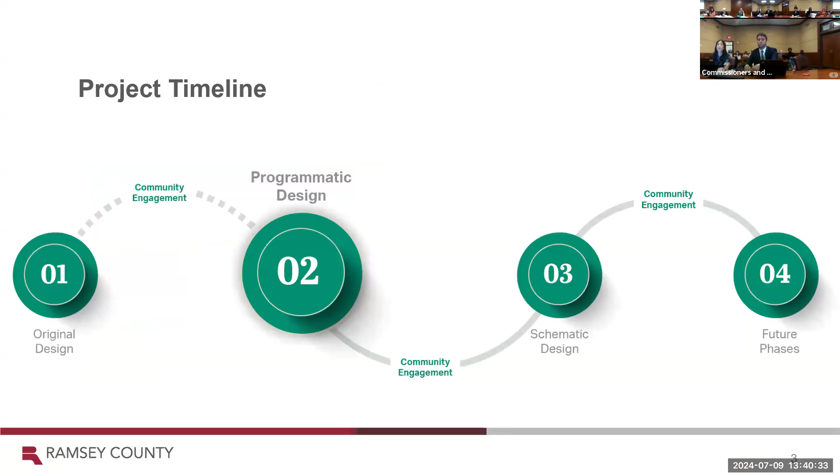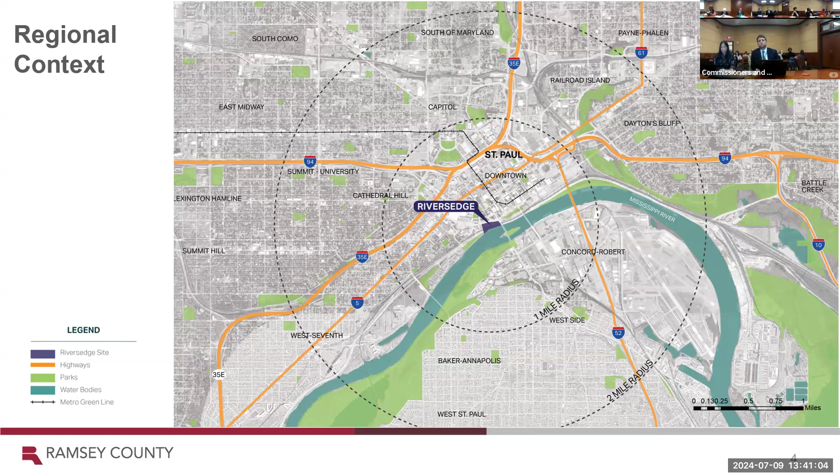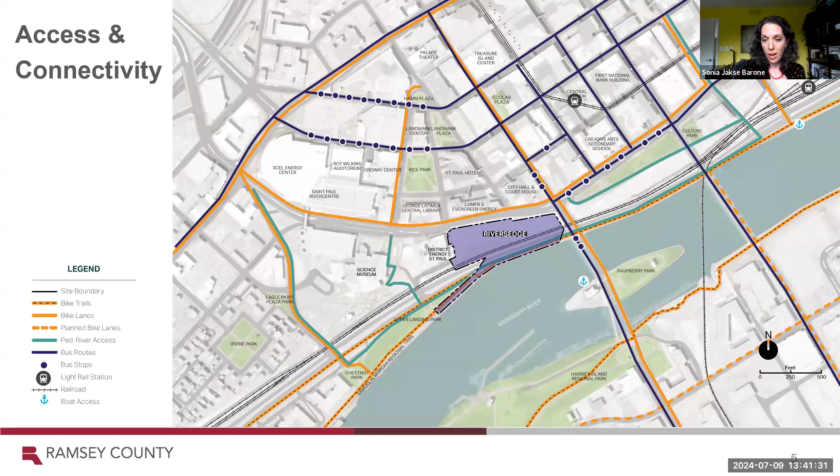Our site is located at a nexus of two really important adjacent projects, one of which is indicated by the orange line you see there, the extension of the Capitol Bikeway project in downtown St. Paul, which will be right across the street from our project. So very excited to have that coming through right as we're also looking at bicycle connectivity. And then also the River Balcony project, which is a larger project of which our site is a component. Claudia, do you want to speak a little bit more to the details of the River Balcony?

Yeah, absolutely. So River's Edge sits within the river balcony. We are one key component of the riverfront, key for a number of reasons, including we have funding, so our project is a little bit ahead of other projects. We also are at a key location. We have the last developable site of this kind on the riverfront in downtown St. Paul, so the opportunity is really significant for us here with River's Edge. But again, within the context of the greater river and downtown St. Paul in general, we are very closely tracking and partnering with our adjacent projects.

As Sonia mentioned, the River Balcony is one of the key projects as well. We meet regularly with them and other downtown stakeholders. The Science Museum is also embedded in that River Balcony; they are also working on a major project, and we're working closely with them. The city of St. Paul and their Public Works Department, we are coordinating with them on a number of infrastructure projects, bridges, roads, the Capital City Bikeway as another example. So I just wanted to highlight that we are a major project here, but we are operating in concert with all of these other projects right along the riverfront, and together I think we will be able to really transform downtown St. Paul.

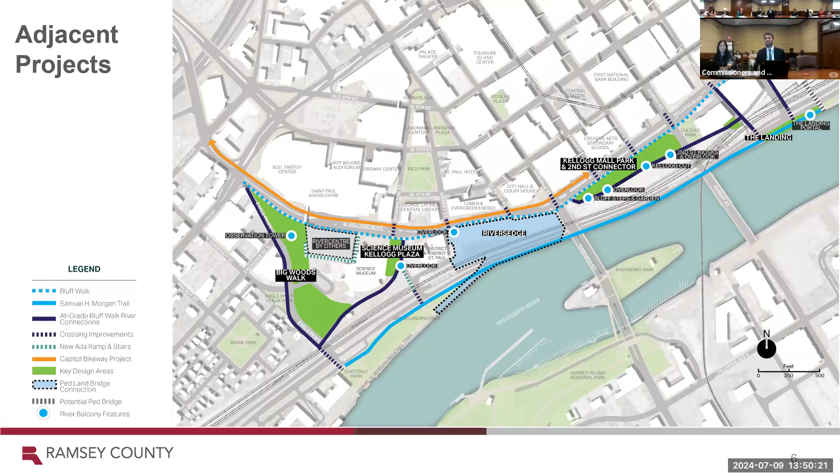At the same time, we were working on the Union Depot, so there were multiple pieces happening. A lot of city people had gone to see the High Line along the West Side in New York, and that was how they connected their river. People came back saying, well, we could do something similar. And the word balcony and High Line sort of got fused together. Interesting — the High Line's pretty cool. This study is part two; there have actually been two studies that reaffirm each other.

Sonia, I think you pointed out. Sorry, I apologize for stepping over somebody there. I'm just excited to show you what we've got coming up.

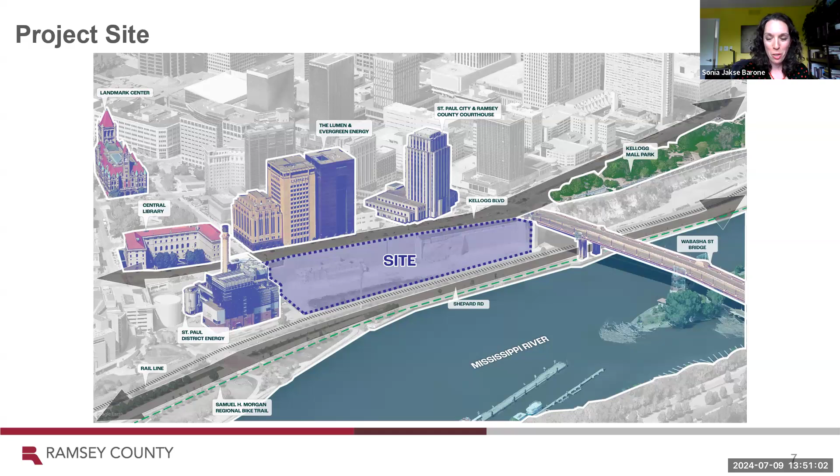So as I was saying, we're going to zoom in and focus on the River's Edge project specifically. You can see the Kellogg Mall Park as one of the connecting pieces noted in the river balcony, and the trails below and above here, as well as some landmarks that you're familiar with, of course. Next slide.

When we were out there earlier this year, we took a series of photographs just to see what we had out there. But as we were looking through them in preparation for advancing the design and this conversation with you, we picked a couple of these out because of the impact of the visuals.

You can see the opportunities here. When you're up on Kellogg Market and St. Peter's in images 1 through 3, there's potential for wonderful views out over the river. And when you're down below on the river in images 5, 6, and 7, you can really see how there is an opening that is ready to be developed right there at the edge of the downtown urban fabric.

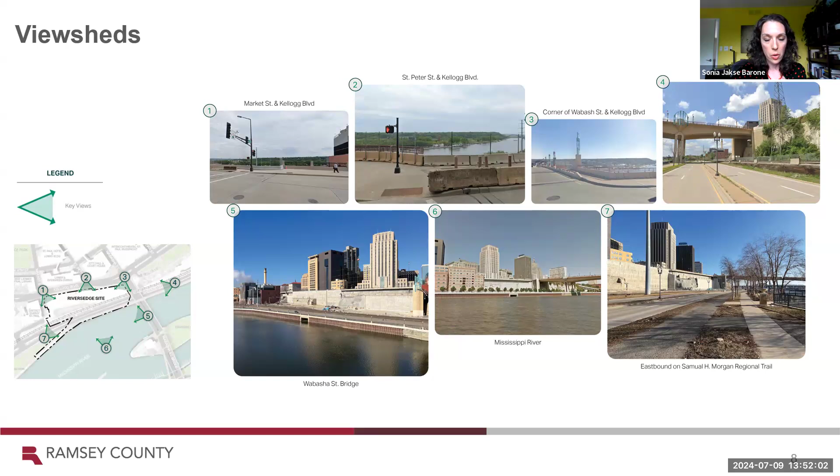So I'm going to turn it over to the NEO Partners ladies who are there with you in person, to introduce the engagement components that they've been working on.

Hello everyone, it's a pleasure to be here with you today. As you can see, I work on engagement at NEO Partners. I'm the Senior Community Engagement Specialist, and my colleague Kylie and I have had the wonderful opportunity to work on this amazing project. Being someone very familiar with St. Paul, having been raised in the city, it's very exciting to see some of this development that will be happening in the future.

Some of the things we've done are key stakeholder interviews. As you can see on the screen, we had 11 key stakeholders in the downtown area and surrounding areas that will be key to understanding the possibilities in this space.

We wanted to make sure people were informed of what is happening in downtown St. Paul. So with Ramsey County, we came up with a robust list of almost 80 key stakeholders, and we had strategic and concise conversations with 11 of those stakeholders. We will progress into more of those conversations as we continue engagement.

In those interviews, we talked for about 60 to 90 minutes with key stakeholders about what this parcel of land really means to them, ways their constituents could actually be in the space, and engagement they'd like to see in the future for this project. We were able to come up with distinct topics and issues important to people, and use that in developing the plan for engagement as we go further.

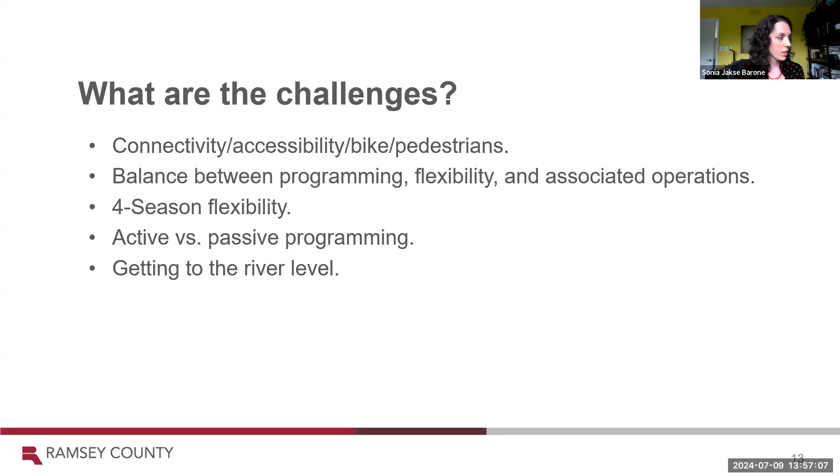We continued our conversations - it was a full workshop - but at the end there were 6 key words that stood out and rose to the top as goals we wanted to make sure we went back to as we went through the design and evaluated our progress against them.

First one being inclusive. That was about welcoming in - you heard from Claudia about the comments that have been there all along about making this a public space, right? Prioritizing public events, but also making sure that the public of all ages and ability levels can access the site and the connection to the river, which brings us to number 2.

Obviously the connection to the river is a huge, important piece, physically as well as visually, as we saw from the images previously. There are great opportunities for views as well as physical connection across the grade change there, but also connecting to the city itself, making it part of the urban fabric, making it someplace recognizable and a landmark, not hidden away from view.

Just because it's incorporated into some of the development opportunities at the site as well, we talked about how playful and exciting elements could be included in the design, making sure we're thinking about all ages, making this a really fun site. Playful meaning both the ability to play oneself, or watch and passively enjoy the playfulness of others through art elements or interactive activities.

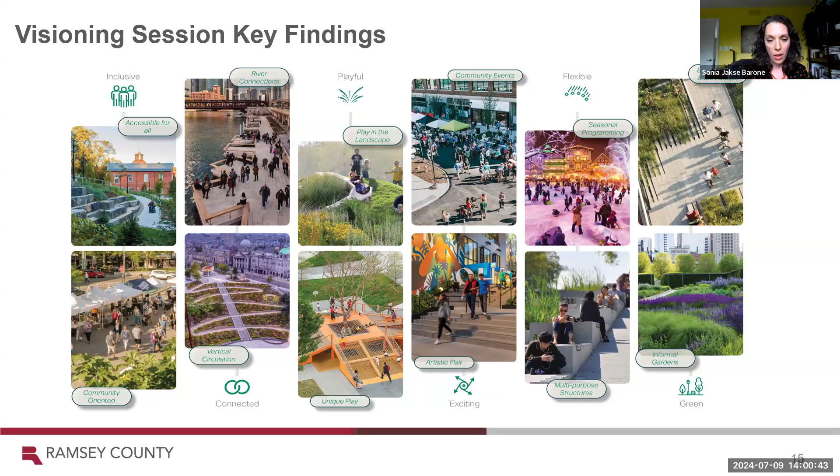I'd like to take this opportunity to turn it back over to those of you in the room who would like to comment on these foundational principles that we have been developing for the River's Edge.

Thank you, Mr. Chair. I'm super excited about this. Many of us, if not most of us, are going to be out in Tampa the next few days, and they have a great waterfront area that's transformed their entire region. I'm going to encourage all of us to look at that, because they were wanting to connect to their water, and they didn't know it was going to be so transformative for the entire region—not just Tampa, but all the surrounding communities are benefiting from the development. So let's pay extra attention as we're exploring this the next few days. I'm super excited about that.

And I'm really excited about all these different values that we have. I was most curious about the play element—I'm seeing some examples here, like what does that look like? I think it's exciting that we do all of these things, and I just wanted to say thanks. If there were any other examples, I guess mini golf and all those kinds of things would be prime for use.

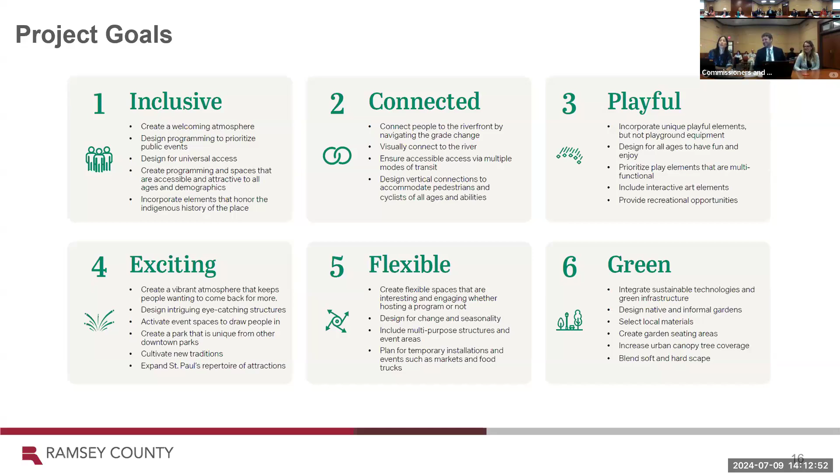Okay, so Sonia, back to you. Sure, yeah. So just to get us back into the physical characteristics of the site, here is our existing conditions.

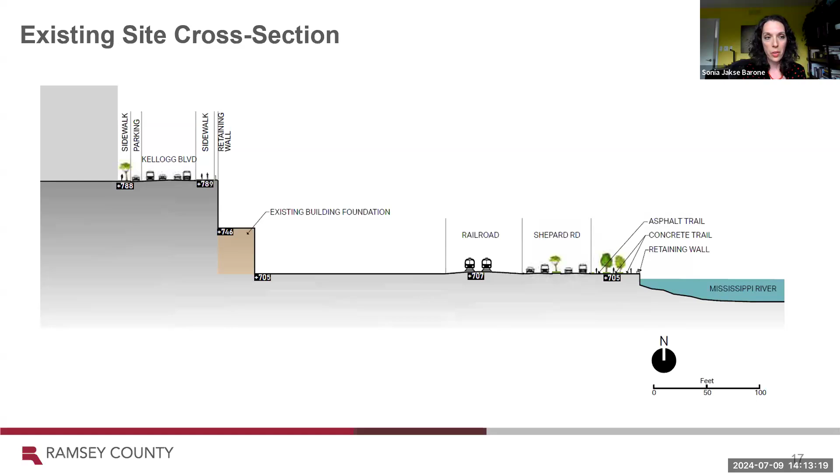The buildings that were there have been mostly removed, and we're looking at a really big grade change connecting between Kellogg and Shepard and the trail there. On the next slide you can see the grade change by the numbers — how long the sidewalk would need to be, or the steps, and so on. It's kind of a daunting thing to look at, as some of you picked up on already.

So the design concepts we've been looking at are really approaches to how to address this — how do we start to make this grade change work on this site? So we've got that to contend with.

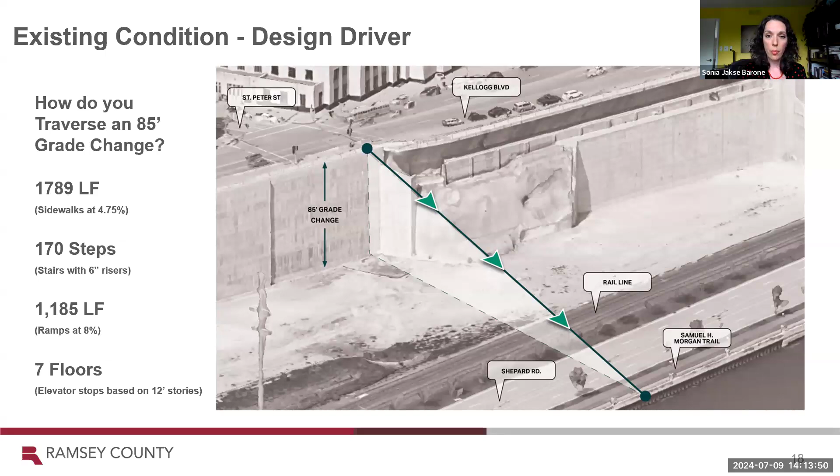On the next slide you'll see additional constraints we're working with. One is the parking garage structure planned to serve the development buildings on the Kellogg level, which will also engage on the river, both the Kellogg and riverfront sides. There are also clearance requirements to bridge over both the rail corridor and Shepard Road, and then the tricky situation of how we come down when we reach the trail level — how do we get down there in a way that allows clearance by the river?

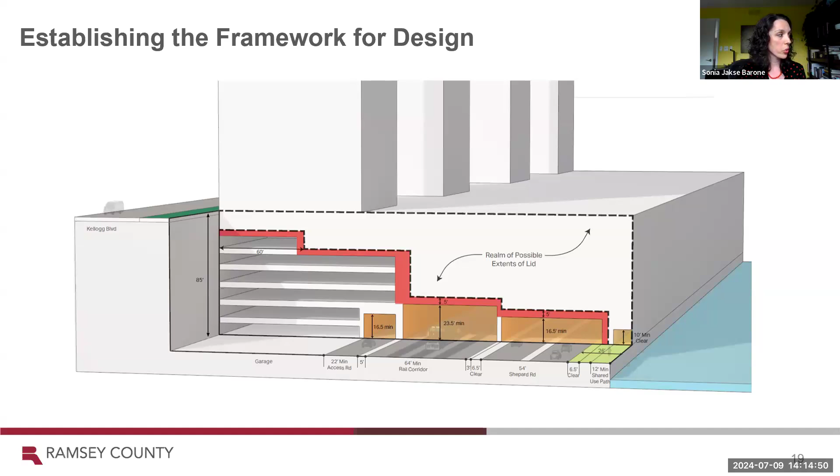So what we're talking about in the next couple of slides is that dashed white box — it says 'realm of possible extents of the lid.' So what can we do within that white box to get us from point A to point B? We have two concepts to show you, the first of which is on the next slide.

We call this the sloping planes concept. It takes the form of a linear park. Because our site is almost 800 feet in length, if we take the whole site into this gentle linear park feature, we can make a very gentle slope happen all the way down there, giving us lots of flexibility along this journey to do all sorts of things.

We're considering, in both of our concepts, some of that dark green up against the faces of those buildings as the activations with the building — flat and engaged in the interactions between the assets from the buildings and the park on that level — and then taking that journey down to the river.

You can see here that this concept overhangs the walkway a little bit and keeps the riverfront trail as it is right along the river's edge. The brown boxes indicate opportunities for lifts or elevators to take you from one elevation to the next.

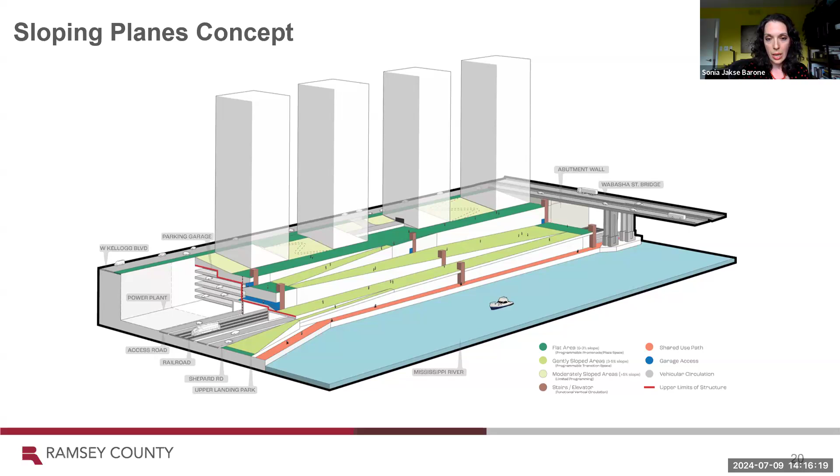On the next slide, you can see a little bit more about how circulation can occur there. We haven't, to one of the previous speakers' questions, sorted out whether we're separating or how we are engaging specifically bikes versus pedestrians. But all of the areas in orange here are completely ADA accessible and would also be accessible for bikes to ride or walk up these routes.

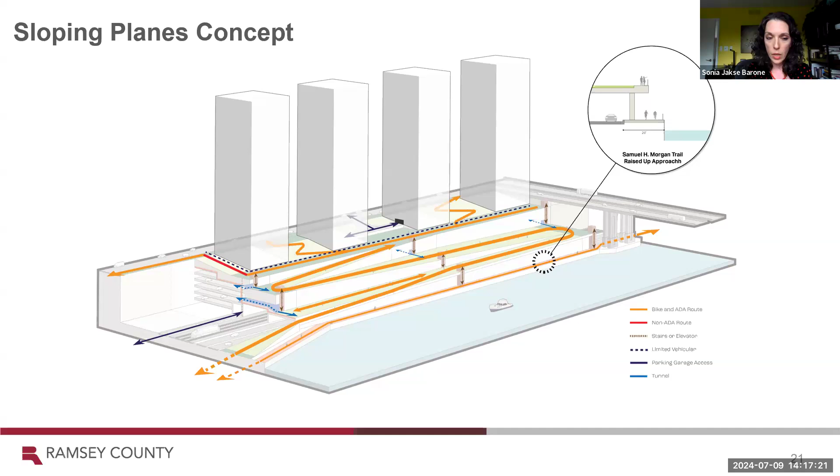So we can go to the next slide. When we are talking about sloping planes, we haven't picked an aesthetic yet, really. There are lots of options and conversations to be had about the specific amenities and things that can exist in a concept like this. We wanted to showcase the wide variety of choices we have to make as we move forward in the design. We're very excited to continue having those conversations with you all and the team.

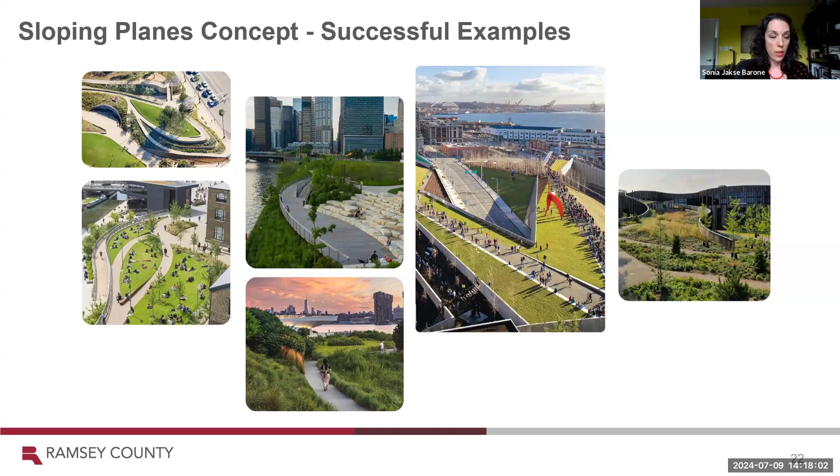At the end of looking at our concepts, on the next page, we did an evaluation versus those six goals we talked about at length at the beginning of our conversation. We felt the sloping planes concept hit a lot of these marks right off the bat: inclusive, flexible, connected. The opportunity for green was significant, as you could see from some of those examples, depending on the choices made as we moved forward.

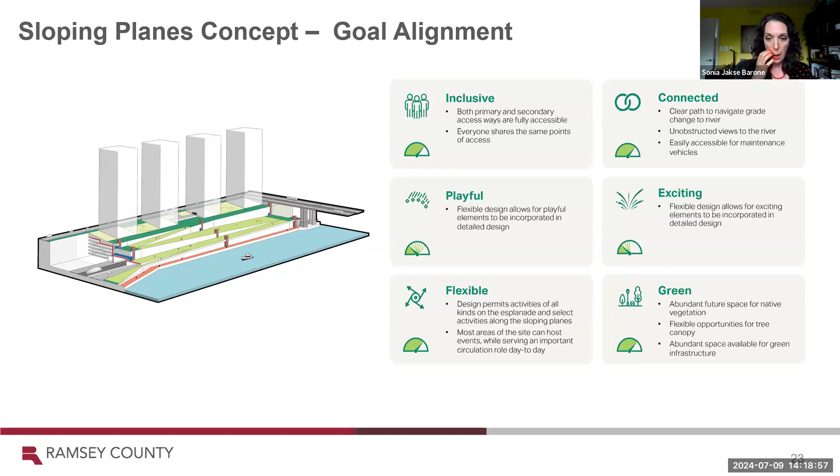Exciting and playful we felt were not quite as immediate in this concept, but because there is lots of space and flexibility, playful and exciting elements can be incorporated as the design begins to be detailed and some of those decisions begin to be solidified. So we felt this was a concept worthy to bring forward into the next phase of design.

On the next slide is the other option we're bringing forward, the other concept we felt was pretty strong. This one takes a completely different approach. We're really talking about focus on the connection at St. Peter Street, very pedestrian oriented there as opposed to vehicular oriented, making a straight beeline connection, emphasizing that view corridor that I believe Josh mentioned earlier.

And creating two tiers connected by stairs, focusing on overlooking the river. Naturally, there are opportunities for accessible routes that parallel these stairs and take a slower, almost sloping planes approach down to connect those two terraces and the street level.

This design looks at the opportunity to scale back a little bit on the park space and have a little more openness to Shepard Road beneath. It doesn't completely cover Shepard Road the full length of the site. There are pros and cons to that, especially because of the specific guard conditions that need to occur when people are overlooking busy roads like that.

The other feature that is different about this concept is the treatment of the riverfront trail. You can see the orange shared use path is now elevated to be integrated into the site. So as you're coming along, you would ride or walk up and meet everyone at that central overlook location, then work your way down towards the landing park on the other side. So everyone is incorporated into the journey across as well as up, not two distinct things - they are intertwined together.

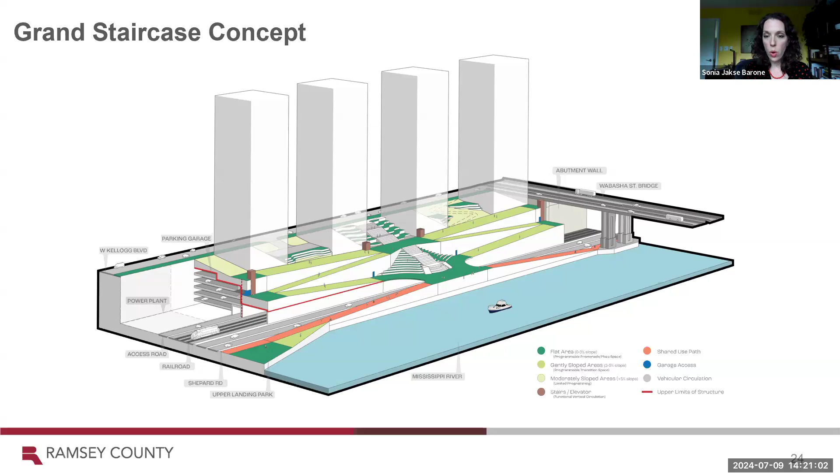On our next slide, we have a little more detail about how circulation occurs here. Again, the orange indicates potential bike and ADA accessible routes, and of course the grand stairway is an element in and of itself. Both this concept and the previous concept, as you can see by the dashed line against the building facades at the top, that area is designed to accommodate emergency vehicles as well as vehicles supporting programming - food trucks or other things necessary to bring into the site to activate or program it.

Again, opportunities were identified to make direct connections to the garage and elevator connections between the different levels on this design. You can see in the bubble how the trail goes up to the top and is no longer engaged at the Shepard Road level for the majority of the site. As we did for the previous design, we took this concept and evaluated it against our goals.

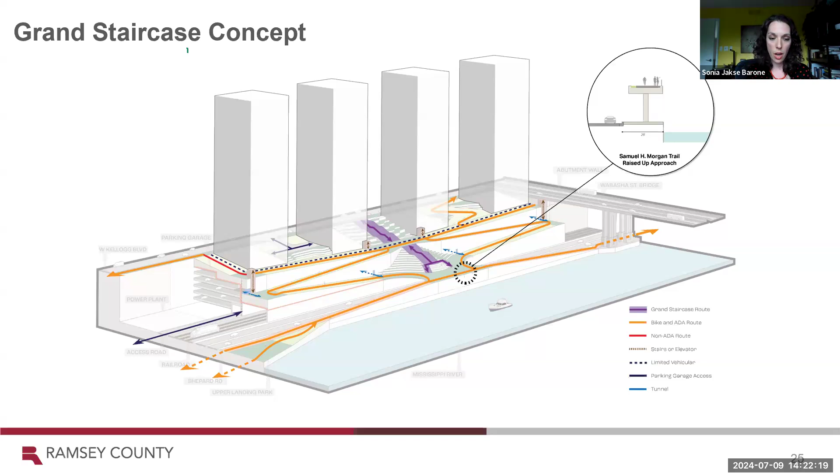On the next slide. Oh, I'm sorry, I didn't get there. I got there too fast.

When we talk about grand staircases, there are lots of different options. So as we did previously, we looked at the variety of ways we could incorporate stairs and a playful terraced approach to the design. You can see some of those examples here, and how we can integrate lighting and planting into this kind of landscape.

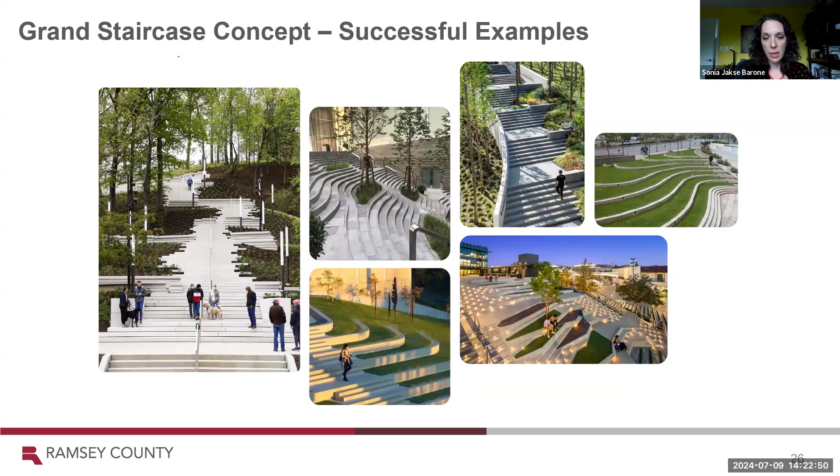Now we'll check out how it evaluates against our goals. We felt this one had a lot of opportunity in the physical layout of the design itself, with the stairs and the manipulation of topography being playful and exciting in and of itself. We felt the connectivity of this one was really strong.

We're making a very strong and intentional visible connection to the urban street grid. We felt it was somewhat less inclusive because it wasn't fully universal, since the stairs couldn't be navigated by strollers and people on wheels. But we thought there was lots of opportunity for flexibility on this site, depending on whether or not we decided to take that space over Shepard Road.

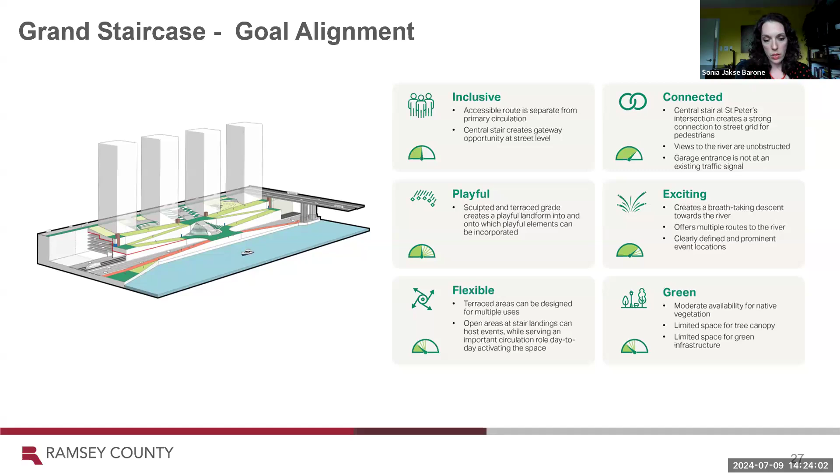We felt green space wasn't quite as strong on this concept, again because there was somewhat less space, but we felt we were pretty strong on most of these goals, so we wanted to bring this design out as well. As we look at these two very different design approaches, we've been tasked to come up with a design that combines the best characteristics of both.

The characteristics that came to the surface were: maximizing and integrating green space for flexible activities, making graceful transitions between the different levels, making strong connections to the urban grid and public awareness through those connections as an asset for them to enjoy, ensuring direct routes to the river and integration with the Sam Morgan Trail, and creating distinct overlook locations where views from the river and that idea of a river balcony could be articulated on the site. That concludes the update on where we are in the design now.

We'll look forward to talking to you again with some of the best characteristics pulled together for you. Thank you so much, Sonia.

This represents what we've seen today and what Sonia has just walked us through. It represents the conclusion of the very first design phase for the Park at River's Edge. I want to emphasize that design is a very iterative process, and this is just the beginning. Where this actually ends may look substantially different than both of these concepts we're seeing today. We just need to start somewhere, based on the engagement we've had so far and the goals and priorities that have risen to the top. This is where we are today, but we are just at the beginning, so we've got a lot of work to do yet.

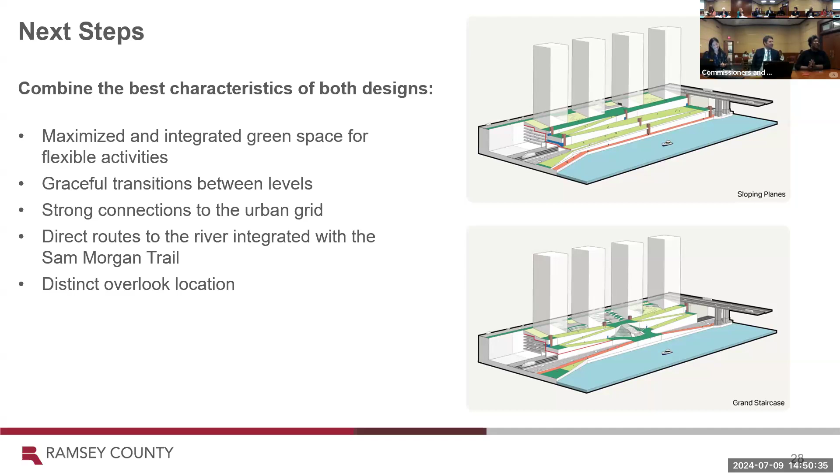And then to answer your first question, I'm happy to turn it over to Sharice. Yes, perfect segue, Commissioner Moran. In our community engagement, I've been hearing so much from you today, and this is what I do, so I'm getting very excited hearing all of your ideas. I hope Kylie is back there typing feverishly about things that we can make sure we connect with community about.

And we've actually been hearing a lot of this already in our conversations. Just to go over some of the things that came up as themes so far, site activation was a very big part of what people communicated to us about. And in site activation, folks talked about the visitor experience. I hear people saying 'experience' often in this conversation today, and so we really talked a lot about that.

They talked about the stream of visitors, how people are actually going to get to the space. We got into a little bit of conversation about how long people will be at the space. And right now, in spaces downtown, we did ask a few folks how long they are in spaces currently, and where they like to visit.

What do you love about those places? That all informs the engagement and then the design of the park. We also talked about recreation opportunities, things that people thought were missing currently in their experience, and we'd like to try to fulfill some of those if possible, looking at the design of the space as well.

Another part of our site activation conversations was the connection to the river. Almost every conversation we had, people talked about how they'd love to experience the river. So understanding what that means to people, if it means touching the river, maybe offering opportunities and places to do that and educating people on where we can do that, or if it means just being able to visually see it, like we discussed earlier, we're really exploring what that means to people in our next segment of engagement.

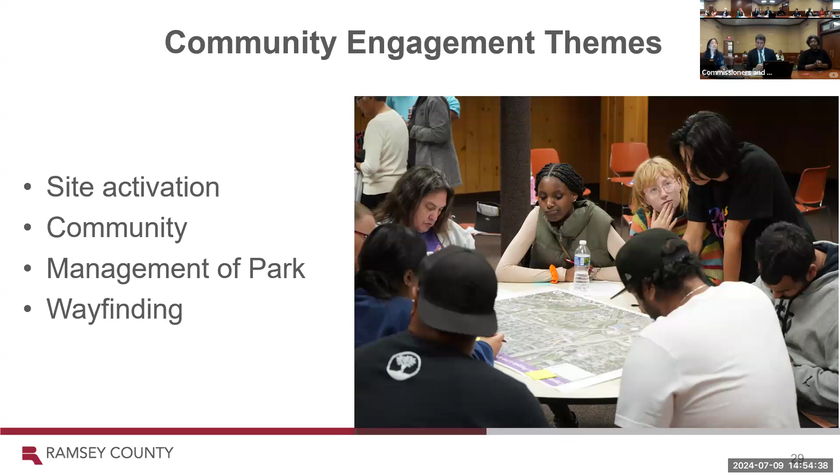We'll try to get more information from people about what actually would be easiest for them when they're downtown in other spaces. How can you actually get to the space, and what will be easiest for you, whether coming from the Science Museum, or from one of the buildings downtown where you have a housing appointment, how do you get an opportunity to come to this space and know that it exists? So wayfinding is a very big theme that came out of our early conversations too.

So all of you have kind of hit on some of those points, and we're really excited to talk about some of the recommendations we have for the next phase of engagement. That will be phase 2. We're really guiding the principles of our next phase from what we found in phase 1.

For future engagement, we're looking at lots of focus groups. While we did lots of general conversations, we'll really get into talking with different cultural groups, people who represent the unhoused community, individuals from indigenous communities, so that we can really understand what people need and what will really make this a welcoming space, going back to some of those early goals of creating a space for everyone. We'll also do some survey implementation and analysis on the surveys we'll be creating.

The next phase of engagement will really focus on public interest, and also the stake in the park in terms of activation and programming, which I've heard here. It's like we have the visual of it, but what's going to be there?

And so we'll really be challenging community members and the public to really think about what you'd like to see and what those activations could look like.

That last comment you made is really critically important to me. I spent 10 years on the Riverfront Corporation. We cleaned up both sides of the river. Prior to Harriet Island and all that, it was pretty much wasteland on both sides of the river. You couldn't even walk it without getting dirty and muddy.

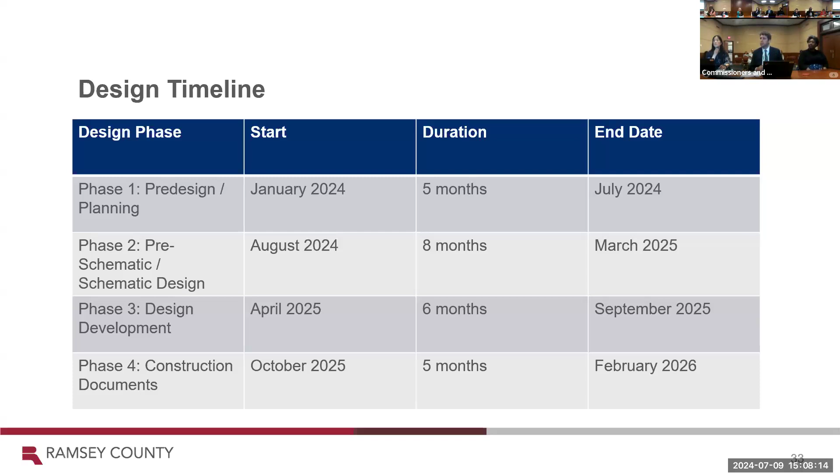Okay, we've got just a couple more slides here, we're almost there. I wanted to share this—a more detailed timeline of our phase 2 design work. I'm sharing this because it highlights something a couple of the commissioners have gotten at, which is breaking it down to understand the costs that will be associated with this.

This next phase is broken into pre-schematic and schematic. Generally you'd go right into schematic, but we're taking a bit of time to do additional due diligence on understanding the costs. We'll be looking at phasing scenarios, as I referenced earlier, to make sure we have a good understanding of what's actually feasible given what we know today and market conditions.

Once we have additional information, we'll be able to make decisions about how to proceed with our schematic design, but we want to do some verification before moving forward with this massive project. I also want to highlight that any reduced phase we contemplate would still include a connection to the river—that will happen no matter what. I know that's a priority of this board and the community, so it will be present in any scenario we move forward with.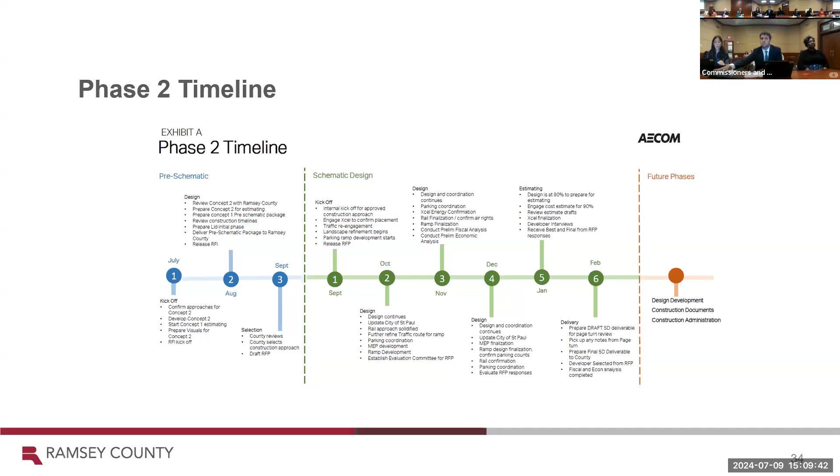And then the last thing—next steps. As I mentioned, we need to initiate the phase 2 park design. I already talked about pre-schematic and schematic and what that means. That's coming to the board for consideration on July 3rd.

And then one other thing... July 23rd, what did I say? Yeah, 3rd, oh excuse me. Thank you, you did it already. Yeah, going too fast here. So yep, July 23rd for that.

And then the last thing I wanted to share is that this project, as Josh shared, remains a public-private partnership. As the public realm of design advances, we are starting to think about development of the towers as well. We are a long way from where we started back in 2017 with the initial RFP.

And selection of AECOM as the development partner. Given the conditions that exist today, AECOM and Ramsey County have determined that the best course of action is to include a local development partner in this project. So that's the initiate tower solicitation laid out there. We are initiating feasibility study analysis to understand market conditions as they sit today, and we are working on a solicitation strategy to evaluate development partner selection.

Victoria: Are they still looking at phasing between the different towers? There's 3 towers—are they doing just one to begin with, or what? Response: The towers will still be phased.

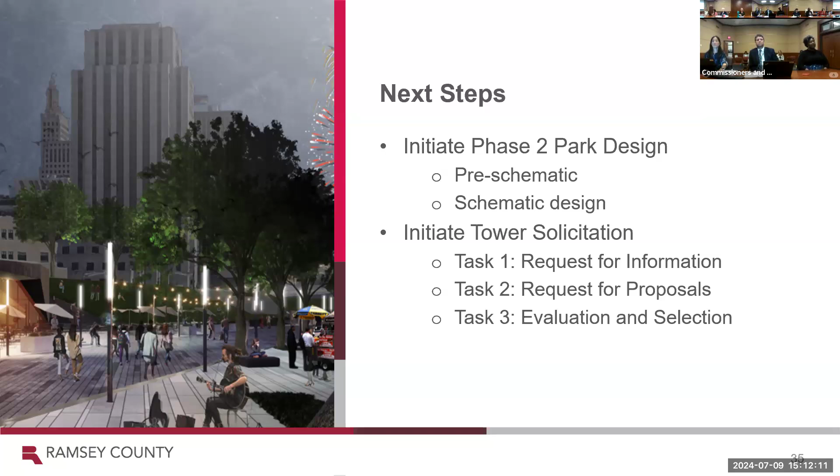The other is just sitting in the project account. Okay, good. Supposedly for a match, that's gonna be for hopefully more—to match a state grant that we're still going for. That's the goal. Okay.

Any other questions? I guess I just want to hear a little more about this local developer, because this feels like a last sentence at 3:10 and it's a surprise. So just say more about that—is it because I know at some point there was a funding issue? Just say more about that.

Yeah, Commissioner—Mr. Chair, Commissioner Martin, it may have sounded like that. I think what we're trying to—no, it was part of, I think, just moving fast and trying to talk about it. I think what we are learning is this is coming out of a post-pandemic world. We're going to need development partners who have a vision in this project too.

And AECOM cannot be the sole version of this. Not because they don't have the capacity, not because they don't have the vision, but because this project, with its potentially 4 towers with 4 very different uses, who knows, it's going to demand it. And I think the other piece that's important right now is if we had to start tomorrow, we'd have to phase it because we don't have enough money to build the entire project. The more partners we have alongside of us, the easier this project gets to build in its full totality.

And bringing in the private sector participation, bringing in the state participation, because we can demonstrate that we have multiple partners. And I think one thing I'll elaborate on, what we learned during the pandemic and post-pandemic, is that there are developers who have really good discipline—they know their focus. I think that's where we're trying to say, let's tap the shoulders of some folks who really understand the local dynamics and the local market, because I think that's going to bring a project out of the ground faster.